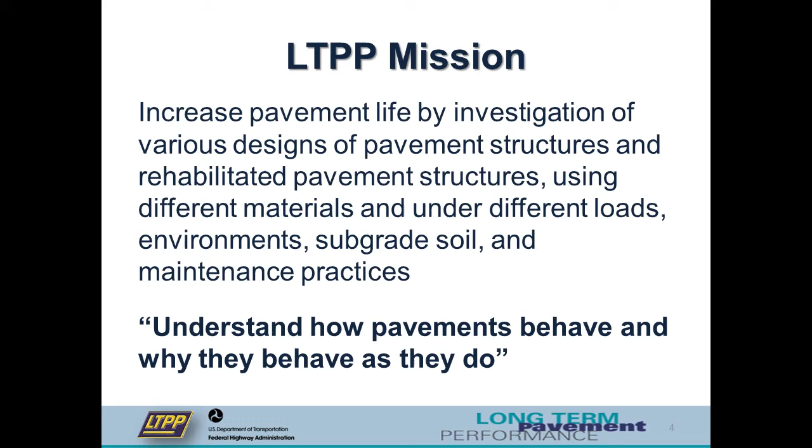Now, in terms of the background, LTPP has a mission of trying to increase pavement life using different technologies. Of course, in the original SHRP program, they looked at asphalt and concrete. The SPS-10 project is now looking at warm mix asphalt mixes, and what we're proposing is a program for both asphalt preservation and concrete preservation, and try to understand how pavements behave and why they work as they do. Our project objective is to develop experiments for the LTPP program to provide both short and long-term performance data on pavements relative to preservation.

There's been a lot of anecdotal evidence that preservation works, and certainly Montana DOT has shown good information on joint sealing and that it works for them. But a lot of other treatments, we're not sure exactly how long they work and what sort of performance jumps we get and the life extensions we get with the associated preservation treatment. So this experiment is to try to document the impacts of preservation and to enable development and implementation of some of the important tools and products.

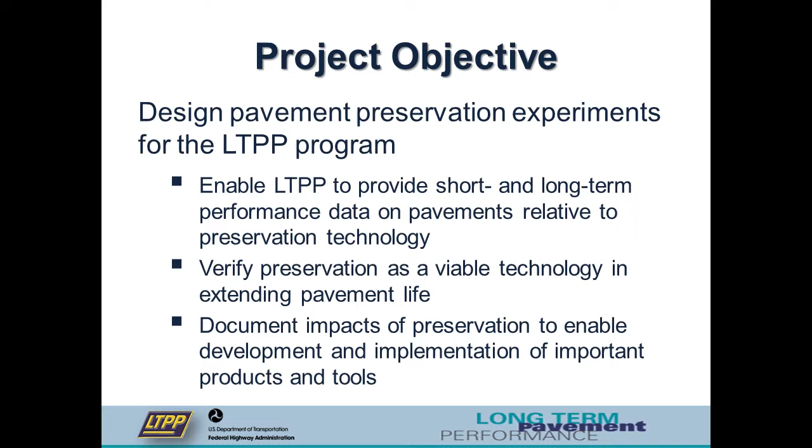Now, this is a two-phase project. We just have got approval of phase one, which discusses the development of the experiment design and the materials sampling and testing plan. I was in charge of the materials sampling and testing plan. Gonzalo was in charge of the development of the experiment design. Phase two, which is going to start now and should be close to complete by the national conference, Larry, will include some really critical elements. What are we going to monitor on each of these treatments? For concrete or asphalt, what sorts of performance indicators do we need to look at?

And as all of you have talked about earlier, probably the most important aspect of this whole program is developing construction guides or requirements for pavement preservation treatments. We can design these treatments, but if we don't have a good contractor to place the treatments in a quality manner, the treatments will not perform necessarily as expected. The other thing, we'll be collecting other data needs like traffic, climate, things of this sort, and then there is marketing and technical support.

The experiment design drives the materials and sampling and testing program because the treatments that are used have different materials and sampling testing requirements. So the overview of the experiment, again, we have two experiments. SPS-11, as Larry talked about, that's asphalt, and SPS-12 is for concrete. They're consistent with other LTPP experiments in that a lot of the data collection stuff is similar and so on.

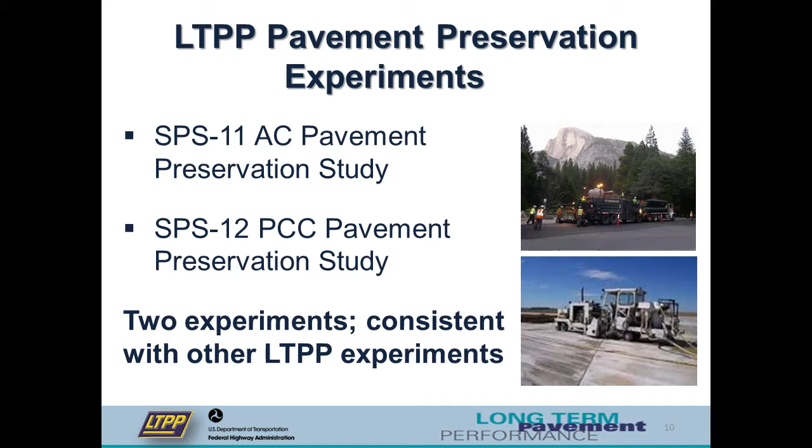The experimental approach was to segregate treatment types and pavement project locations into discrete groups and apply the same preservation treatment at different times on the pavement structure. Now, in the previous experiment, SPS 3 and 4, they applied multiple treatments. NCAT and MnROAD are applying multiple treatments, but the one question that a lot of people cannot answer is the optimum timing of the treatment.

Now, Scott discussed that a little bit earlier with some of the work that he's done on slurries in RTC, but we want to put the same treatment down at different times to see if we can document the optimum timing of the treatment. So NCAT and MnROAD are looking at multiple treatments. We're looking at basically a single treatment that can be placed at different times, but we have the opportunity to place supplemental test sections at the same location to evaluate different products. That's not precluded from this experiment design.

That's, as Larry Scofield aptly termed, the Cadillac design, one where we can look at different treatments and look at optimal timing for different treatments. We think the studies complement one another, and that's why we've got Ben and Jim and Larry on the ETG so that they can make sure that we complement other studies.

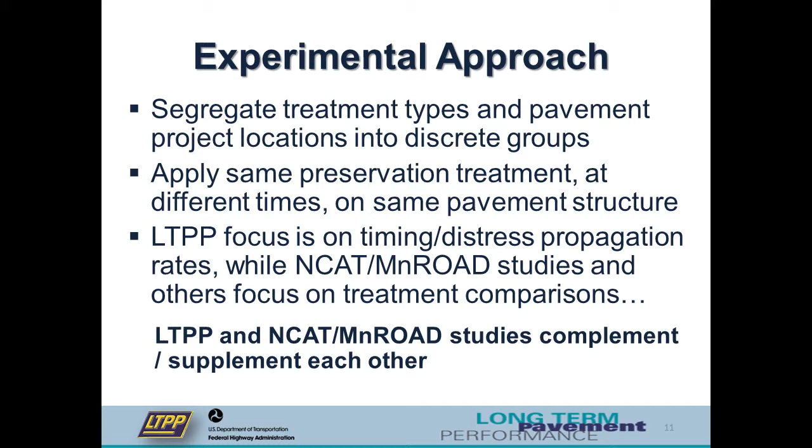An example SPS-11 project might include 6 test sections: 1 control with no overlay, this would be for a thin hot mix overlay, say, and 5 treatment sections applied at different times, maybe 2, 4, 8 years, or maybe a longer time depending on the deterioration rate, or a shorter time if the pavement is deteriorating faster. These numbers are not fixed in stone, as you'll see later.

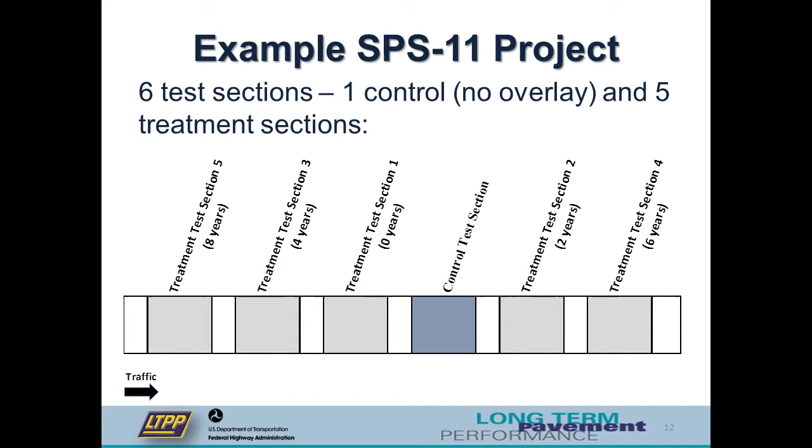Each pavement has a unique distress propagation rate. Some are going to crack more quickly than others, and this is why we're looking at this one treatment required per project. It'll reduce the number of test sections required. It'll enhance implementation because the states will have to bear the construction costs, but the Federal Highway Administration will take care of all the monitoring costs. So it's in the best interest of the states, in my opinion, to do more sections and add supplemental sections to evaluate the products that you might want to look at.

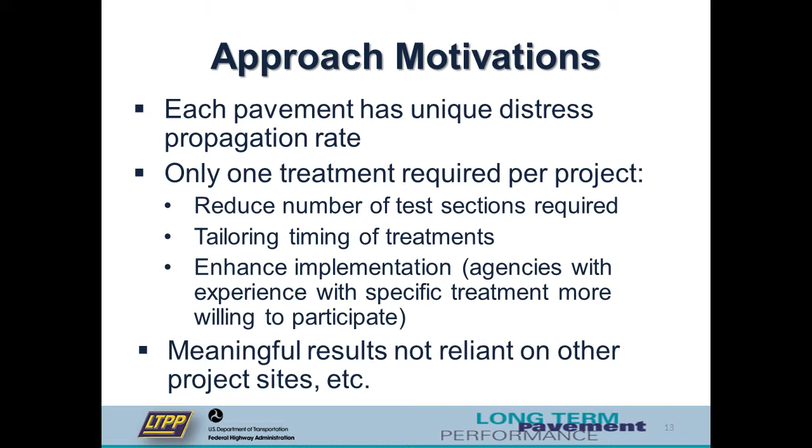And therefore, meaningful results are not reliant on all the other project sites like they were in the SPS 3 and 4 studies, which was a factorial design which required using data from different climates and different traffic areas to get meaningful results. Now, there may be some shortcomings, and one of them is materials. In the SPS 3 and 4 studies done in the 90s, in the western region, you used one contractor, one aggregate, and one emulsion. Isn't that correct?

Old timer over there, Larry? Larry was on that tour. That's when he was on the dark side.

And that's going to be a problem in this study because we may not be able to use the same contractor. Therefore, what do we have to do? We've got to make sure we've got good construction guides to make sure that a low bid contractor is not going to cheapen the job. Not that there's anyone that would do that, but we want to make sure that that doesn't happen. And so we'll have just-in-time training. We'll have all sorts of things within those construction guides to ensure the products are placed properly and to eliminate any of the problems with workmanship.

We were originally a little concerned as to the reception of the approach, but the reaction that has been gleaned from audiences where these presentations have been given has been very positive to look at the timing effect. But we want to make sure that we stress that there are other opportunities, such as the supplemental test sections.

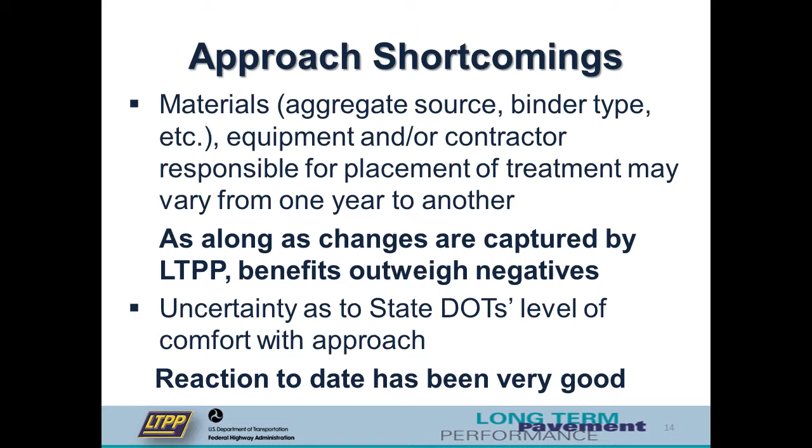Now, some of the key considerations are what are the preservation treatments that we're going to look at, the type and age of the pavements. Again, preservation treatments should be placed on good or fair pavements, so we want to make sure that happens. We'll have up to 20 years to monitor data, but we're hoping to get short-term data as well as long-term data out of this project. We want to make sure we monitor the climate and the traffic and make sure that we do have some replicate or repeat sections in the study. And then finally, the supplemental sections.

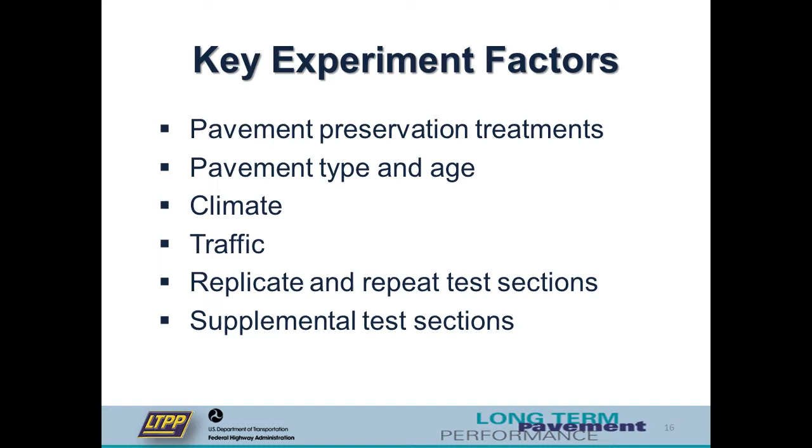We want to make sure that the states buy into the idea that they can add sections to study other treatments. Now, we're involved in an NCHRP project right now on performance measures and did a survey of all of the states, I think Montana and Idaho and all the states that are represented here. And it came back that the three most important treatments in the asphalt area were thin hot mix overlays, chip seals, and microsurfacings. That's what the people wanted. Now, crack sealing is important, but that was not one of the top three, even though Larry and Jim would like to see it included.

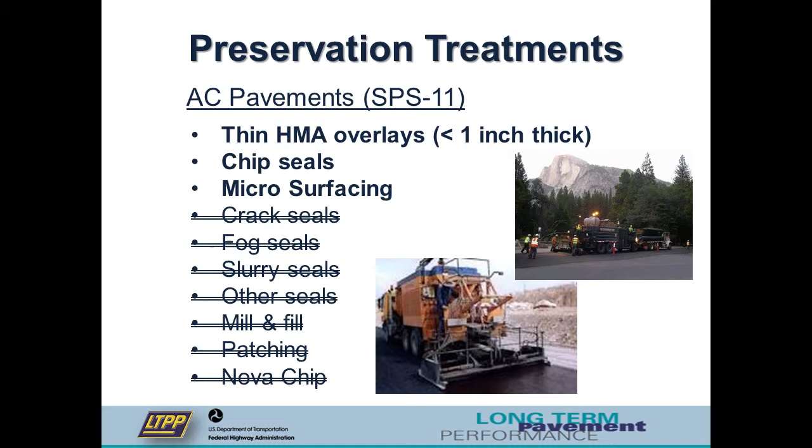That doesn't mean that the agencies cannot include it in this study to look at the effectiveness of crack sealing, but these other treatments were not as highly ranked, and we thought it would be important to focus on the most important treatments initially as a part of the core treatments, and then add additional treatments as needed as a part of the supplemental sections.

The same was true for SPS-12. Diamond grinding and dowel bar retrofit were right at the top, as was joint sealants. Joint penetrating sealers weren't even on the radar, or concrete hardeners. Partial depth patching, full depth patching were, but we ended up through a series of meetings with the ETG and others and came up with, for concrete pavements, looking at diamond grinding and dowel bar retrofit, joint sealants and joint penetrating sealing. Now the diamond grinding could be independent, like you do, David, on some of your sections, or it could be done in combination with the dowel bar retrofit.

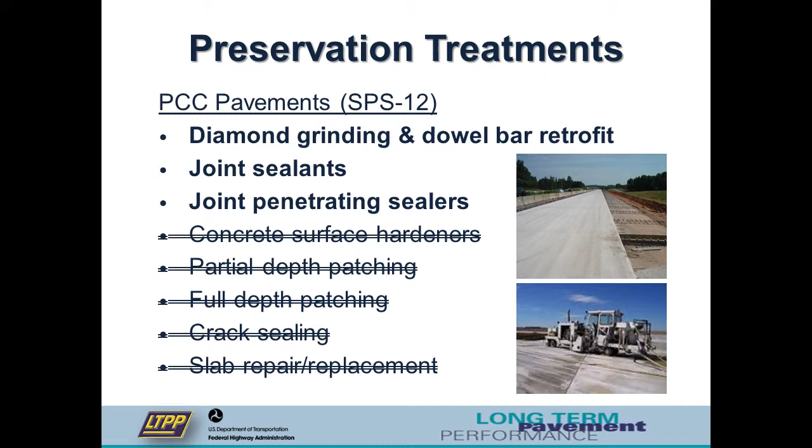The pavement types, we originally thought we might look at original asphalt pavements, but how many original asphalt pavements are out there? Most of them are probably asphalt overlays over existing asphalt pavements, so we're going to use that as the SPS-11 existing pavements, and then for the SPS-12s, a few states use CRCP, very few states use reinforced concrete pavements, so most of the concrete pavements on which we'll place the treatments will be the jointed.

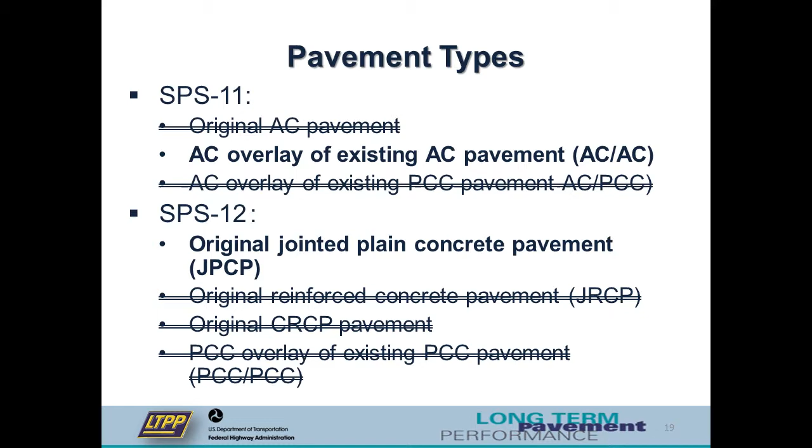As far as pavement age, now these aren't set in stone. There's going to be flexibility built into some of these numbers, but we want to look at placing asphalt treatments maybe starting less than 4 years. It all depends on the condition of the pavement, and the concrete pavements anywhere from 4 to 10 years. We want to make sure we get it just before it starts deteriorating, and then we'll apply the treatments at time 0, which might be 4 years, time 0, which might be 10 years, and then go out into the future to evaluate the optimum timing of the treatments.

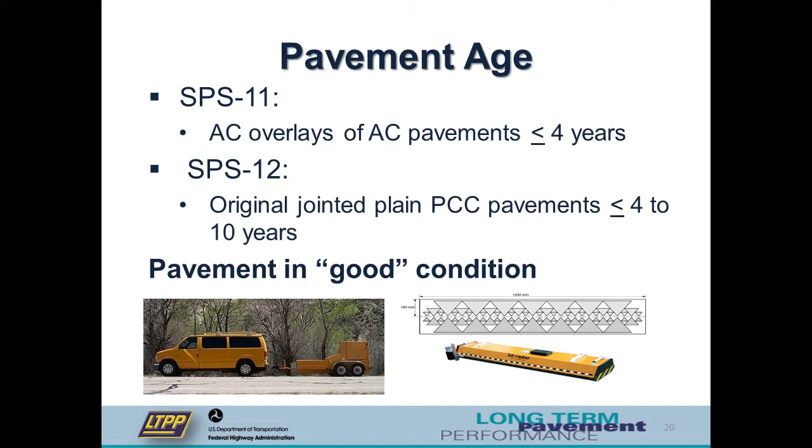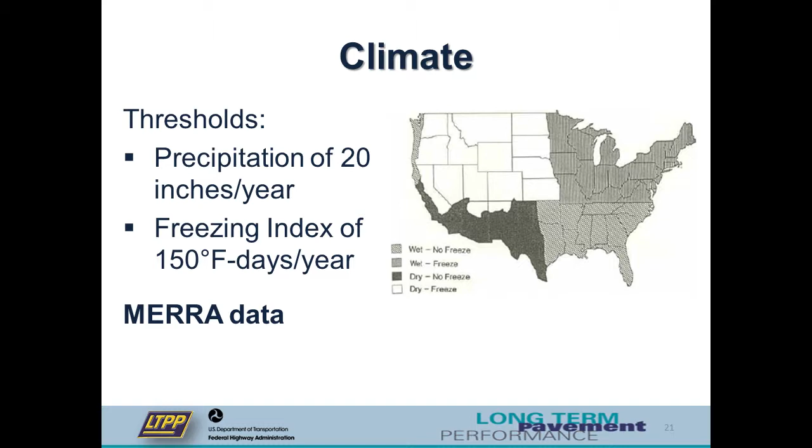Climate, we'll use the same LTPP climate data and thresholds, and we'll probably rely on this MERRA data for temperature, which is what LTPP is using at this point in time. It's apparently the best database. I haven't used it yet, but my colleagues say it's a very good database for climate and temperature.

Traffic volumes for SPS-11 experiment, we'll probably look at both volumes and ESALs depending on the importance of the pavement. On low volume roads it's probably volume only, but on higher volume roads it could be a combination of volume and ESALs to pick out our test sections, because we want test sections in all of the climate zones, and we want test sections that are in different traffic levels.

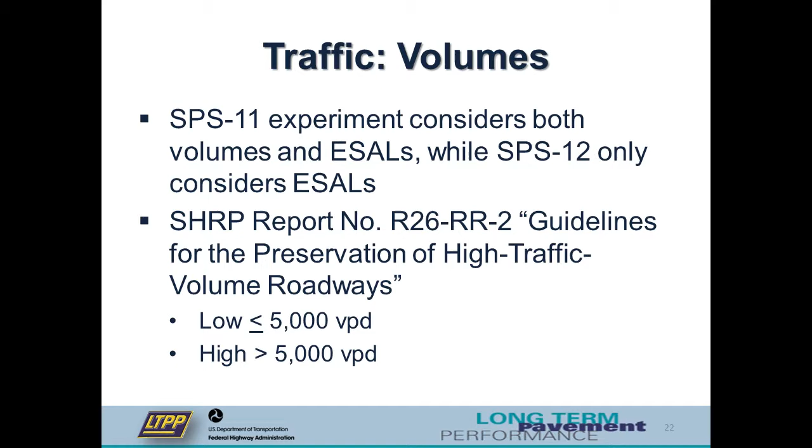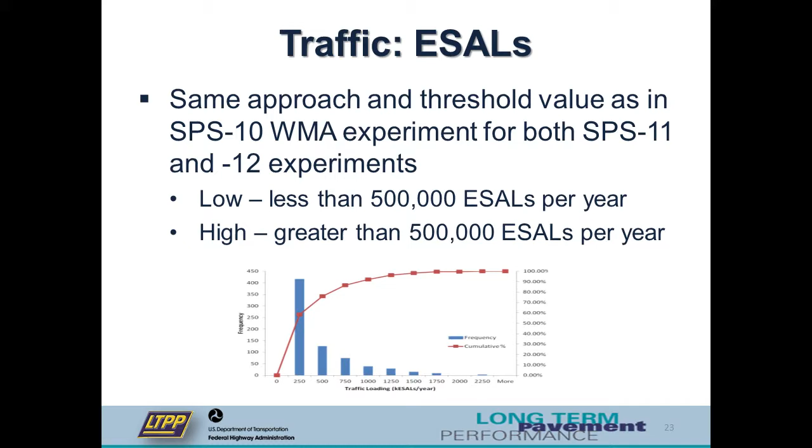For concrete pavements, it'll be ESALs only, because concrete pavements are thicker, and the approach that we're looking at is the same as what is used in the warm mix experiment, which has just begun. They're already building projects, and so in the warm mix projects, the differentiator on ESALs is 500,000 ESALs per year. Less than that, it's low. Greater than that, it's high. That's what we're looking at right now. And this kind of summarizes the differentiation between low and high traffic based on both ESALs and vehicles per day.

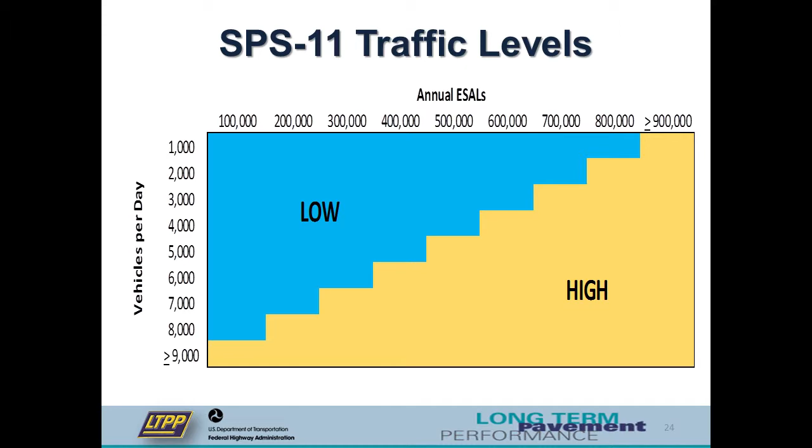Now again, there will be repeat sections, and there'll be the supplemental sections, which for chip seals, what would be a good supplemental section for a chip seal? A cape seal? A scrub seal? You know, a variety of, what? Crack sealing could be a good, yeah, that would be good. You got it in, didn't you?

For microsurfacings, what would be a good supplemental section? You could put slurry seals down, you could put cape seals down again, you could put a variety of treatments. So you've got these options to put down different treatments. Now we do have crack sealing or joint sealing for concrete pavements, guys.

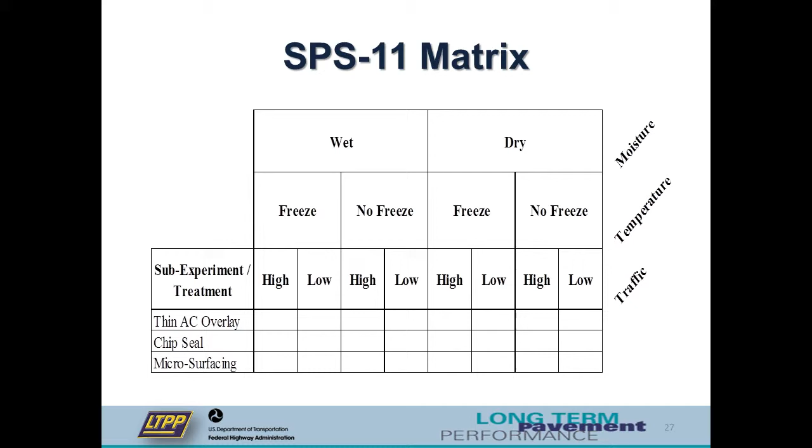A typical SPS-11 layout. This one says treatment test section 1, 0 years. This is the control. So this one is with a treatment, let's say it's a thin hot mix overlay placed in 0 years. This one is going to be placed in 2 years. This one is in 4 years. This one's in 6 years. And this one is in 8 years. So we'd have a variety of times that we could place these treatments.

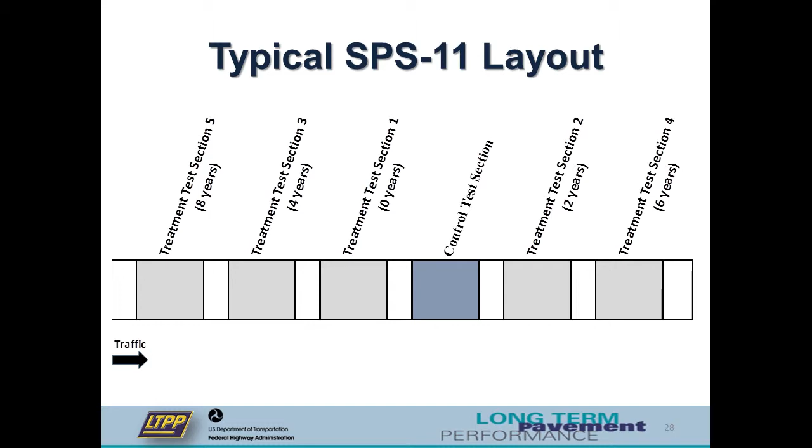A sample template for SPS-12, we have the 3 treatments: diamond grinding and dowel bar retrofit, joint sealants, and joint penetrating sealers. Now, how many of you have used or are familiar with the joint penetrating sealers? None of you. See, Larry, I told you no one would know.

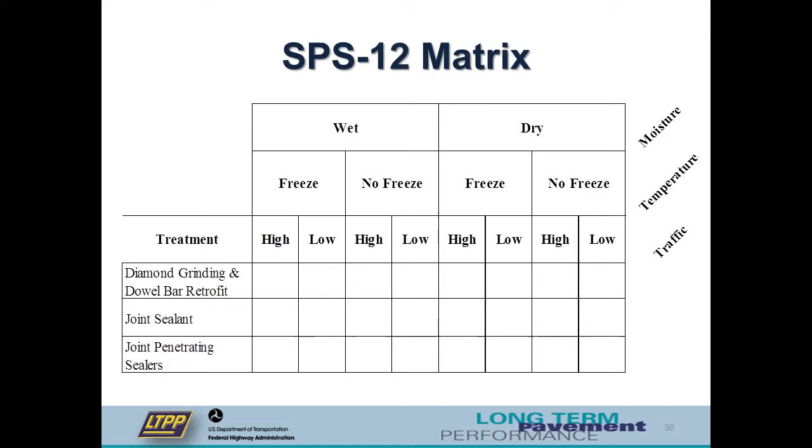Joint penetrating sealers are used by about 20-some mid-continent states. What happens is the de-icing chemicals get into the joint and they start deterioration of the joint and cause a fairly significant failure. I wish I had a picture of it, but I don't. But it causes a failure around the joint. And so by using penetrating sealers, these are silanes or other sorts of materials, you can waterproof the joint and prevent the de-icing chemicals from getting into the joint and causing the deterioration of the pavement.

The diamond grinding and dowel bar retrofit, again, we have a control section. We would diamond grind in 0 years. We would diamond grind and dowel bar retrofit in 0 years. Then we would diamond grind and dowel bar retrofit in 5 years, diamond grind only in 5 years, and I think diamond grind only in 10 years, and diamond grind and dowel bar retrofit in 10 years. So we would evaluate the effectiveness of diamond grinding only and diamond grind with dowel bar retrofit.

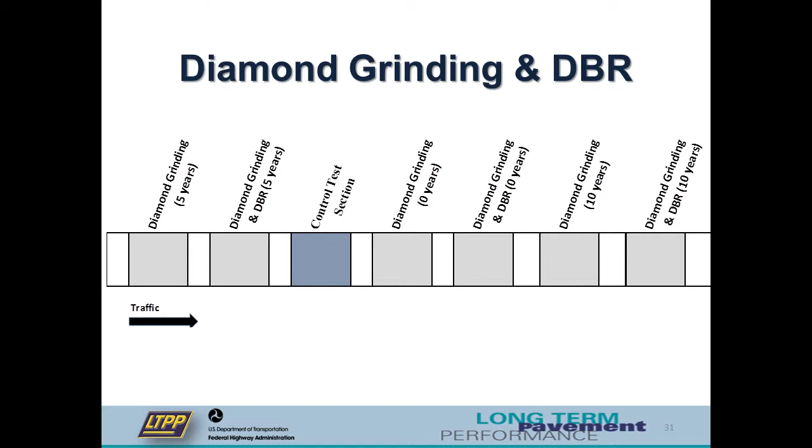A lot of these concrete pavements probably don't need dowel bar retrofits. Diamond grinding might be more than adequate, and that's one of the reasons we have an expert like Larry on the panel to help us in laying out these experiments. Joint sealant. Now this one will be a keep and replace sealant. So we've got controls with no sealant, and then we have a control with sealant.

So in this case, we have three controls: one with no sealant, one with a sealant kept as is, and another one with a sealant that will be maintained.

As you can see, here's the 5-year group: this is a keep sealant replaced at 5 years, this is replace the sealant at year 5 and replace it every 5 years. And then this is a keep sealant at 10 years and replace at 10-year intervals, and this is a replace sealant at year 10 and replace at 10-year intervals.

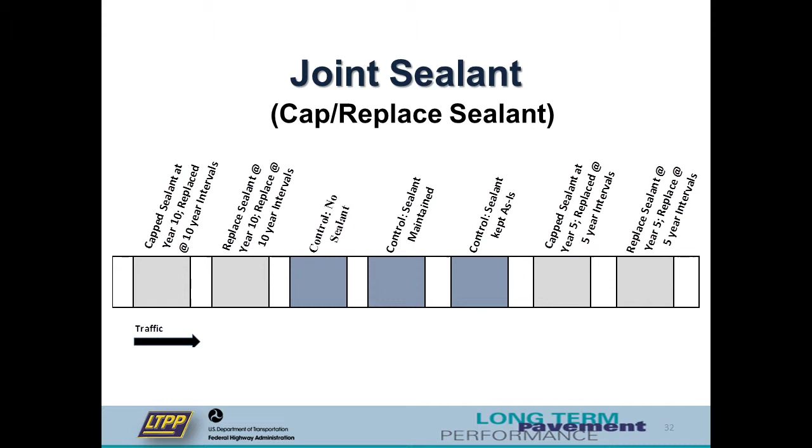So we're looking at the effectiveness of no seal. There's a group out there called seal, no seal. We're going to look at no seal, seal, seal maintained, and where you replace the seals periodically to see how well those will perform. Larry's to be commended for persisting in getting this portion of the study in the program. I don't mean to be picking on him, but someone has to.

Penetrating sealers, again silanes or siloxanes, and again we'll have three controls, and then we'll put sealers down at 5 or 10-year intervals to look at the effectiveness of these on the performance of the joints in areas where there are considerable problems with degradation of the joints.

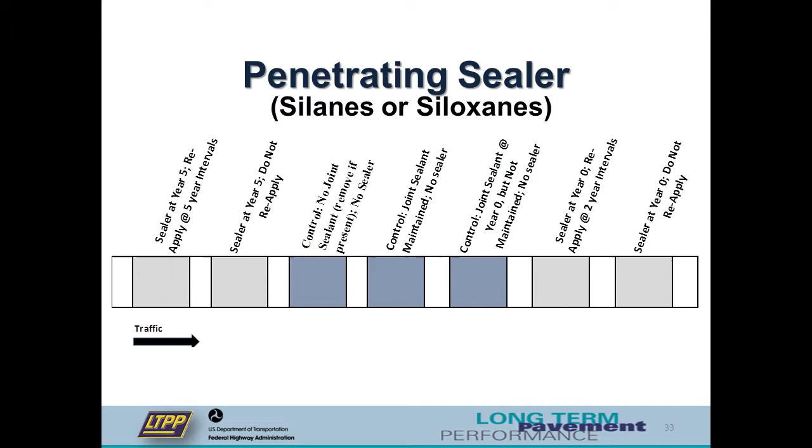So the typical test section will be 500 feet long. There will be buffer areas on either side, so the contractor has enough length to get a uniform section, and then the sampling areas will be at the end of the section. In some cases on the leave side, and in some cases on the approach side. It depends on the treatment.

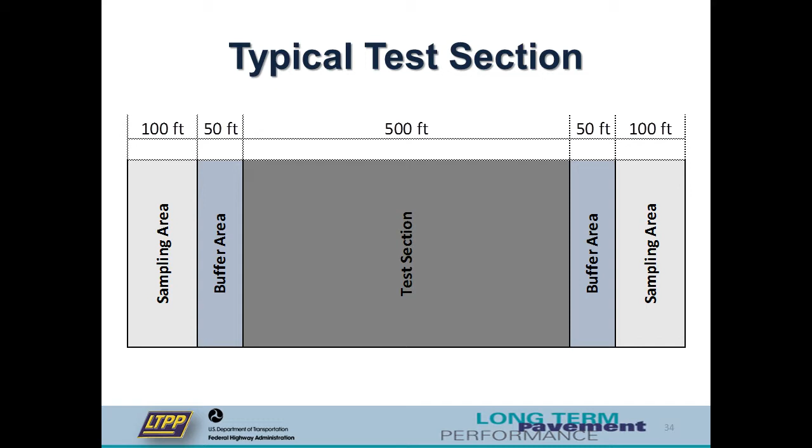Getting the word out: so far we've had a lot of internal meetings with our ETG. The first three check marks there are ETG. We did meet with LTPP in May in Washington, D.C. and presented this approach to them. I presented it at Denver at the Emulsion Task Force meeting in June. And then we had another webinar in July with our internal group. Jack Springer of FHWA presented it to the AASHTO Subcommittee on Materials in Pittsburgh.

We are going to present at the LTPP preservation ETG in January when that's out of place. I don't know what that one is - I'm sorry, but it's out of place and I'm not sure what it is. But Gonzalo presented it at the Midwestern Pavement Preservation Partnership.

He presented it at the TRB Oversight Committee last week, and then I'm doing it here at Bozeman. It will be presented at TRB in 2016 to the LTPP state coordinators. It will be presented at technical sessions at TRB, Anita Bush's committee on pavement preservation, and Judy Corley-Lay's committee on pavement maintenance at TRB.